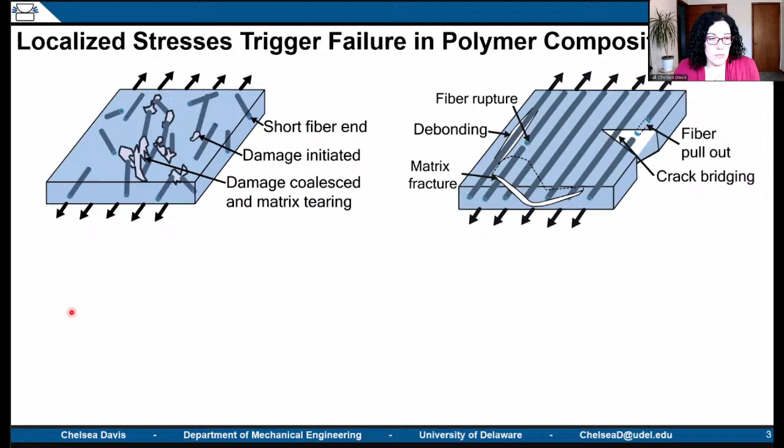events. So what we've been focusing on in my group is how can we use these mechano-responsive materials to highlight where stress is concentrating and then to observe how, if failure initiates, how does it propagate through the material? What is the chain of events of stresses that get distributed through the material as it fails?

So what we're going to be looking at today is how stresses accumulate and then lead to failure around round and, how should I say this, flat fiber end geometries. So we're going to be looking right at the fiber tip of this chopped fiberglass you would see in all sorts of moldable composite systems.

So as I said, we're going to have two main goals of this particular portion of our research. We're going to be trying to visualize these localized stresses and develop a quantitative strategy that allows us to take pictures of the mechanophore that's activating and interpret that as stress distributions within our material.

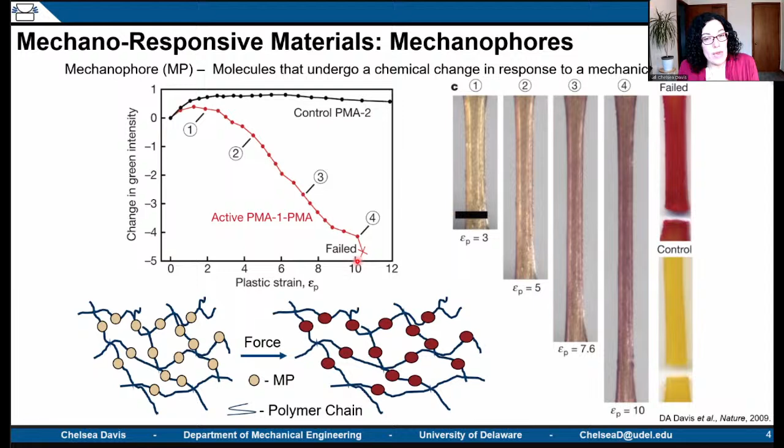So we did not invent mechanophores within my group. We are not chemists, and we are standing on the shoulders of giants in the sense of we are utilizing mechanophores that have already been developed in the labs of Jeff Moore and Nancy Sottos, as well as we're using the particular form of spiropyran that has come out of the lab of Professor Steve Craig at Duke. And these mechanophores have been shown over the past couple of decades to have this really, really specific change in their color or change in their intensity as a function of how much mechanical deformation you apply to the system.

So when we first started working on mechanophores in my lab, I kept getting the question of if you pull on it, does it get brighter? And in that, you have to be really specific about what it is. If you're talking about the continuum system that you're pulling on, yeah, the more you pull on this object, the more color saturation you'll observe, or the brighter, the higher the fluorescence intensity you'll observe.

But if you're talking about an individual molecule, these are fluorescent molecules that have a very specific quantum efficiency or a very specific brightness. You can think of them as a binary reporter, right? They are on or they are off, and that's it. So what's really happening when we pull on one of these highly deformable elastomeric polymer networks is we're activating new populations of mechanophores with every subsequent strain step that we're taking. We're turning on different populations of mechanophores as we elongate and stretch the longer chains in our network.

So if we think about how the number of mechanophores activated correlates to the amount of deformation in our material, we can then see that we can start to develop some fairly straightforward relationship between how bright our sample looks to how much deformation is in the material. And we wrote a review article a couple of years back trying to summarize some of this work in an engineer's introduction to mechanophores.

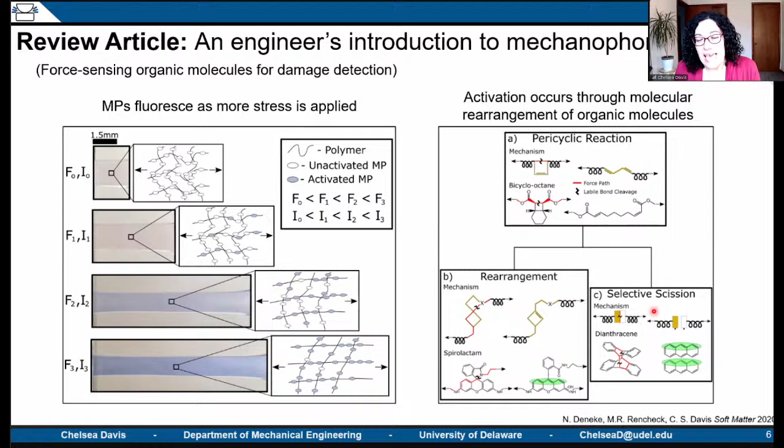And in that review article, we talked about the two classes of mechanophores that are most popular in the literature right now. And these all stem from some sort of bond scission event that occurs when you apply a force across a labile bond. And by biasing the activation energy, or the energy required to pop that bond, you can induce an isomerization in the case of some of these reversible mechanophores, like the spirolactam I'm showing here, or you can induce a selective scission event where the molecule becomes two molecules that will either both fluoresce or one half of the molecule will fluoresce after the scission event. And these tend to be irreversible mechanophores.

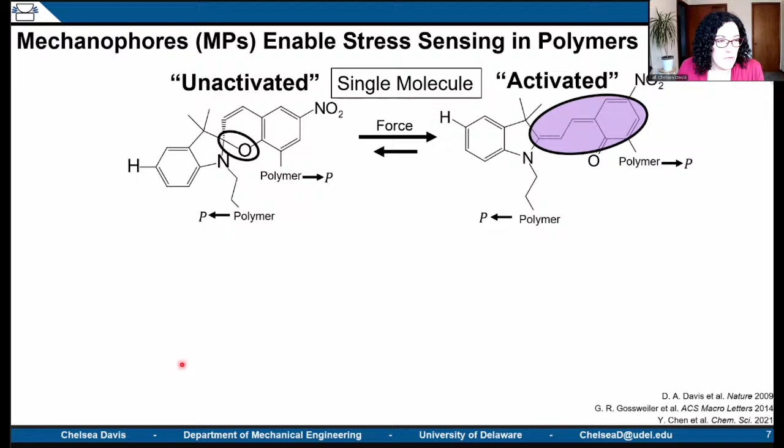So the particular molecule that we're using in my group right now, our workhorse, is spiropyran, particularly the nitro form of spiropyran. And when we have this molecule in the unactivated state, you can see this carbon-oxygen bond is going to be the bond that we're targeting. So we're applying a load at these two polymer handles, and if we apply sufficient force, you'll observe that the molecule opens up, goes to an isomerated state, or an isomer of itself, and you can see the conjugated state that it adopts, and this is where the fluorescent center of this molecule is going to be found. So this particular molecule is really fun because if we put it into a transparent silicone, which is most of what I'll be showing you today, we can write the Davis Research Group's initials and see them under a fluorescence microscope.

And we also get this visual color change that requires just our eyeballs to be able to identify. So with all of this, this is really nice, but so far everything I've shown you is on or off, more or less. It's really, really qualitative and sort of wishy-washy. And what we wanted to be able to do was to put numbers. Can we say it is this bright, therefore the stress is X at this location within our material?

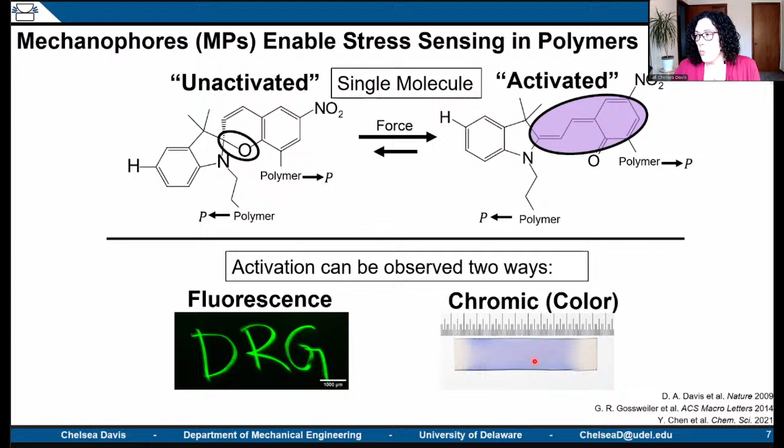And we weren't the first people to think about this. So several groups have used either digital image correlation. This is where you put a bunch of speckles onto your system and then track how those speckles move relative to each other in order to map a strain field onto your material. Or several other groups have utilized finite element modeling to calculate what the stresses should be within their material. And two of the first works that came out trying to correlate this stress response to the fluorescence intensity of mechanophores were looking at the stress concentration ahead of a propagating crack.

So if you take something like a multiple network gel and you put a notch in it and then deform the material, as you deform the material further and further, you get a larger stress field arising around the tip of that crack. And they correlated this to the activation or the intensity of their mechanophore. And this has happened in rubbery and glassy systems. But for us, we're working with polydimethylsiloxane. We're working with Dow Sylgard 184, sort of the classical perfect elastomer, which is a terrible way to describe it, but it has become a material that a lot of people in the soft matter mechanics of materials community use as sort of the test subject of choice.

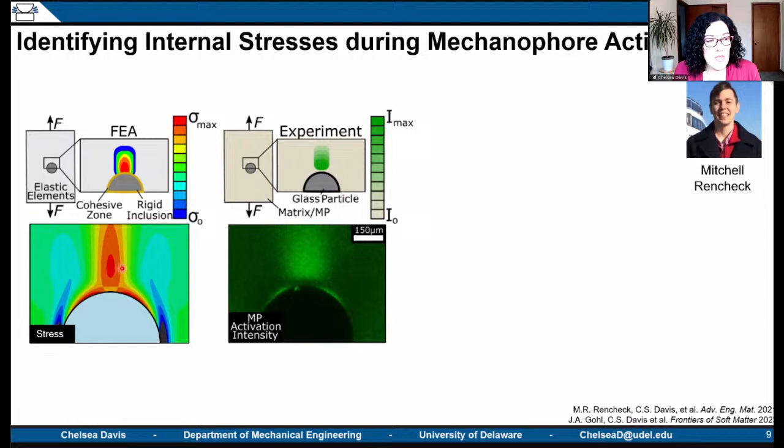So this is a little glass bead that we've put inside of a big chunk of this transparent mechanophore functionalized silicone. And if we deform this single particle composite, we can observe at the poles a really significant stress concentration and stress distribution occurring near the surface of our sphere. If we then take this, which is maybe one of the easiest geometries possible to simulate with finite element analysis, we can calculate what the stress field should look like in one of these loaded samples. And then by simply applying a spatial correlation between what we've calculated the stress should be and what the fluorescence intensity is that we observe in our microscope, we're able to get some sort of quasi-linear relationship between the mechanophore activation and the deformation of our material.

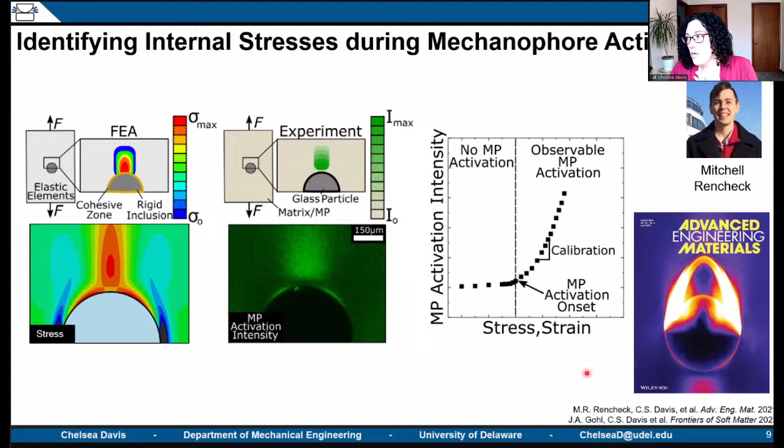And this was the first mechanophore paper that came out of my lab several years ago, showing how we had performed this analysis. So in order to do this, I do want to tell you a little bit more about the system we're using, the mechanics of the experiment. So all that we're doing is we're combining a micromechanical load frame that is going to deform the sample laterally over the objective of a laser scanning confocal microscope.

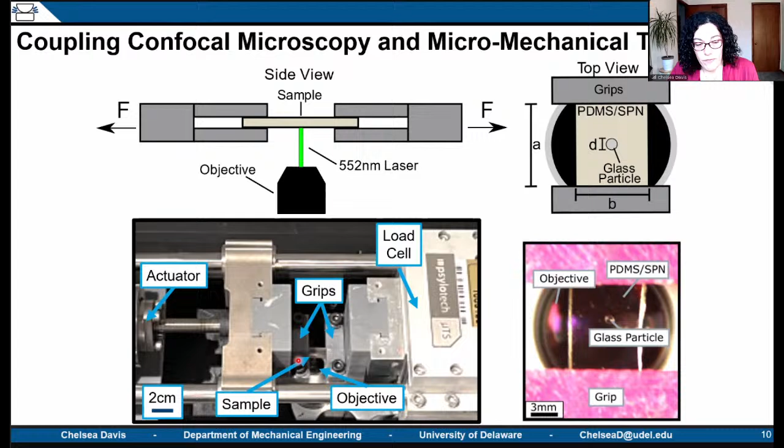So this is what it looks like as a straightforward cartoon, where we have the bead centered over this big circle here as our objective. This is what it looks like when you look down at the microscope, where the particle is about 1 millimeter across, and we can see the objective underneath it. And then here is just an image of the Psylotech Mu-TS that we utilize in order to perform these experiments. So there was quite a bit of materials characterization and sort of process refinement leading up to being able to do this.

And after Mitch graduated, another graduate student in my lab, Jared Gohl, came in and really helped us with the chemistry to refine and control the interface between our particle and matrix. So as I said at the beginning, what we care about is composite interfaces. So what Jared did with his undergrad research assistant, Tristan Wiley, is they functionalized the glass particle before embedding it into our mechanophore functionalized silicone with either a long perfluorinated silane, a short perfluorinated silane, or a vinyl termination.

And this was our attempt to get low, medium, and high adhesion, because in the case of the vinyl terminated silane, we could induce covalent attachment as we cured our PDMS matrix around the particle. And this was really successful. This was a fairly straightforward strategy that allowed us, if we look as a function of strain, I'm pulling up and down on this object.

And here in the low adhesion case, the sphere acts as sort of a void in our sample because there's no real crosstalk or interaction across the interface. And you can see the mechanophore starts to light up at the poles where the particle is preventing the hole from adopting the full ellipsoidal grain of rice void structure that it wants. But what's more interesting for us was we observed really interesting Gent-Park debonding or Gent-Park cavitation that occurs when you have a weak-ish interface that holds for a while, stores a lot of mechanical energy, and then leads to a large-scale cavitation event. So this you can think of as like a hollow Easter egg that has opened up at the top and bottom of our particle.

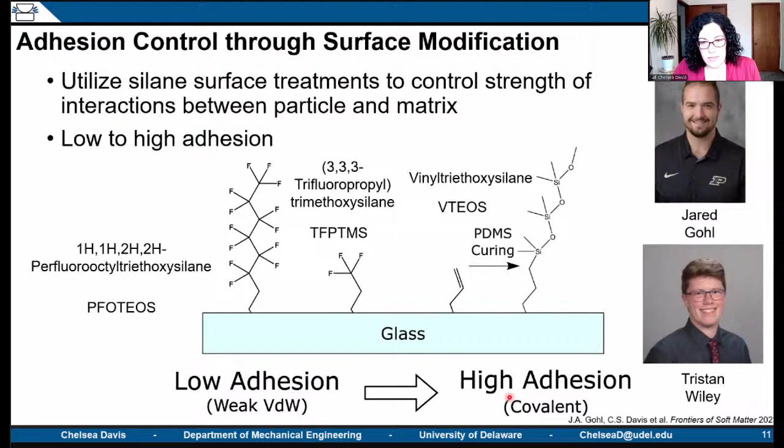And I don't know if I can play these again. Let me try. For the high adhesion case, what we were really going for, this was not the highest adhesion case. We improved our method a little bit beyond that. But if we keep going, we're already at 40, 45, 50% strain. And you can see the interface is starting to fail in the two lower cases. But here, what isn't it going? There we go. You can start to see stress happening around 90, 100% strain. And we're going to get a Gent-Park debonding on one side, but we really care about this right here. This is going to allow us to perform the calibration that I showed you on the previous slide.

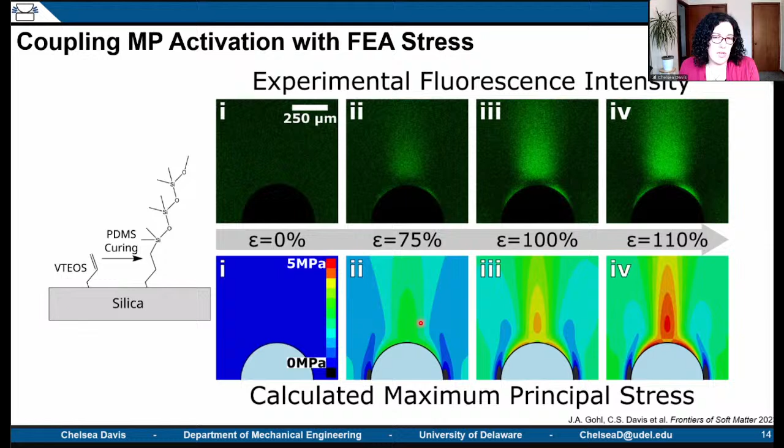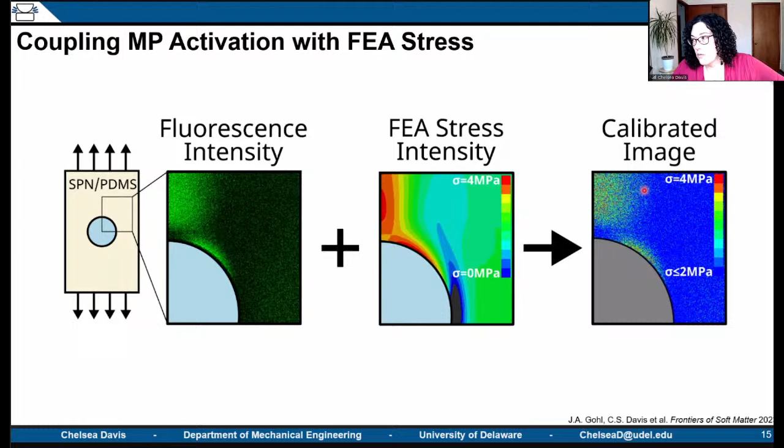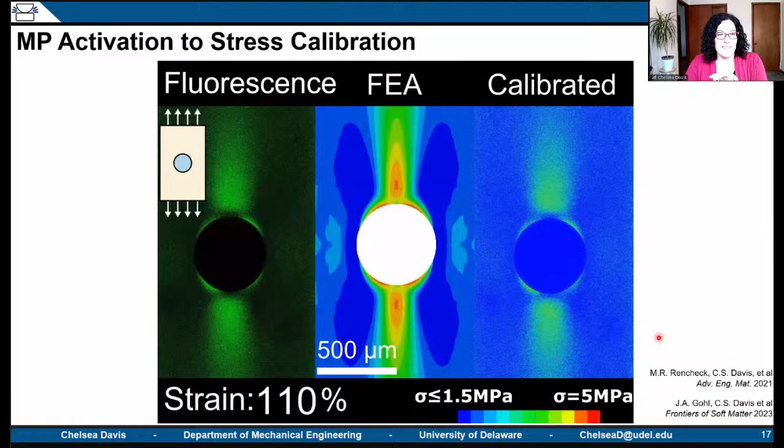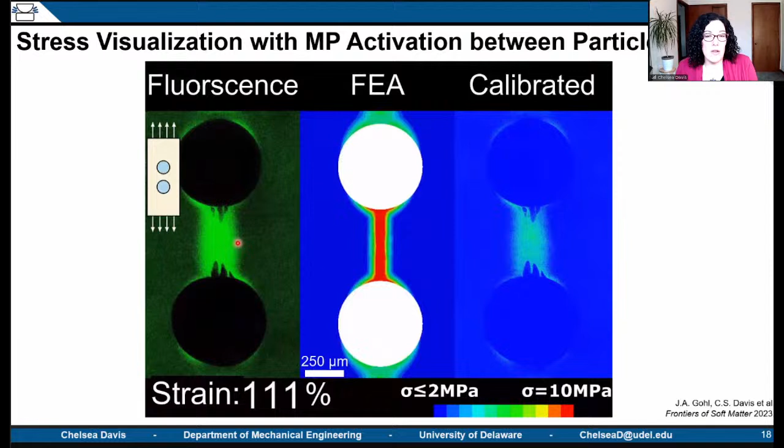So what I'm showing you is just what I showed on the previous slide now in video format during one of these experiments where we have the fluorescence intensity, we have the FEA doing absolutely nothing until about 70% strain, and then we have our calibrated image where we have mapped these two and you can see the stress. Okay, I am underwhelmed that this works because this is the experiment we calibrated to. But now we can take that same calibration, and if we take two particles that start at one radius of separation and start pulling them apart, what you'll observe is we get this really exciting crosstalk or concentrated stress event where you have these two particles really close to each other. And this starts to become important in particle reinforced elastomers, like the tires that you drove to work on.

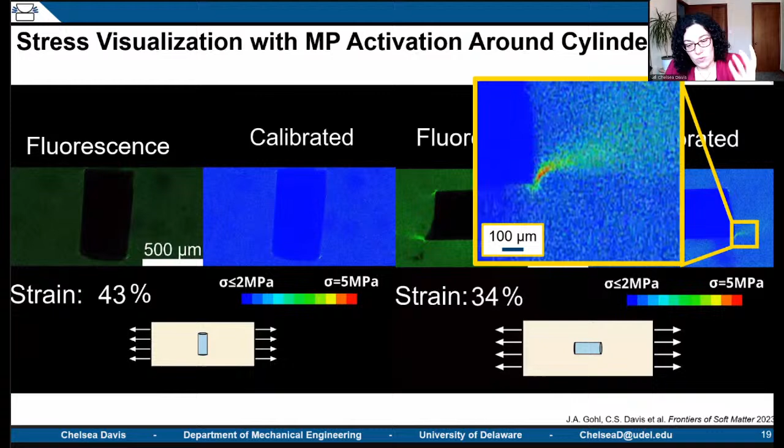And I particularly love this image or this video because it really highlights why we're doing this. Why are we trying to use mechanophores in order to visualize stresses? And it's because it allows us to see features or stress concentrations on the order of tens of microns, which we haven't necessarily been able to do before. So now that we have this hammer, we kept looking for other nails. And the next student to join my group came back to this question and was like, well, we've seen what happens around a single spherical particle, but what happens at the end of a fiber if you start messing with the shape of that geometry?

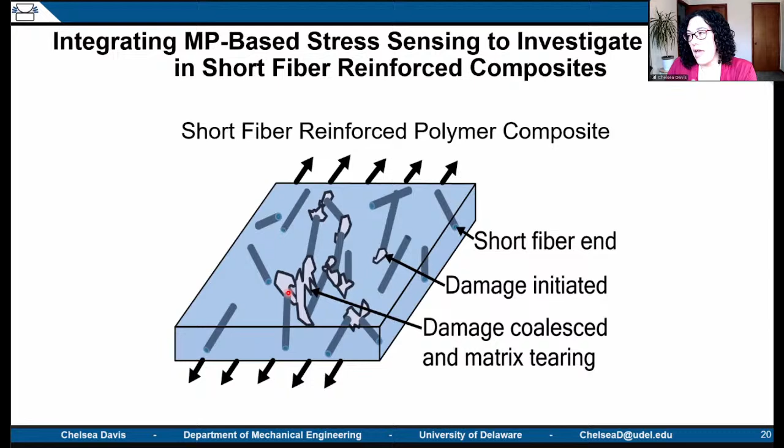So in short fiber reinforced composites, some people are starting to propose modifications to the geometry of these fibers in order to toughen the whole system and prevent fracture events, or at least enhance their fracture toughness. So my current senior student in my lab, Nazmul Haque, has been working on just that.

We recently published an article where he took really big glass fibers and performed single fiber pullout experiments where he was still using his mechanophore functionalized matrix. And now he's going to pull one giant fiber out of the matrix, and he's messed around with the shape of these different fibers, going from round all the way to flat.

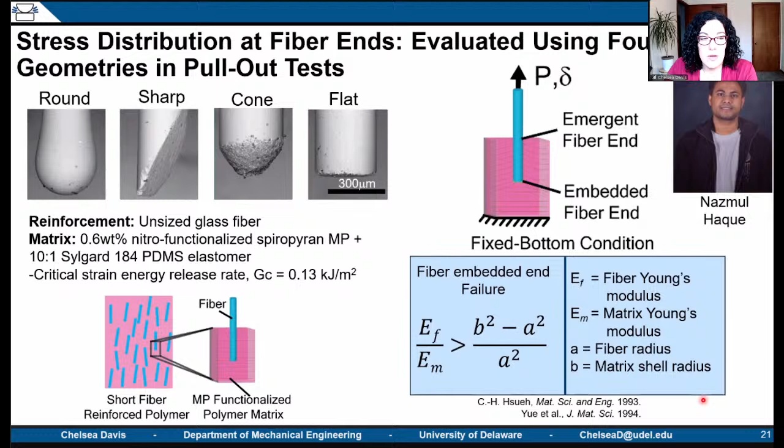And he was really careful to follow some of the analysis that already exists in literature from the 90s in order to ensure that in all of his experiments, the failure event occurred at the bottom of the fiber, or the embedded end, rather than at the emergent end and then having the matrix just unzip from the top down. And he's performed all of this analysis to ensure that his geometry and modulus mismatch between fiber and matrix was such that we always get embedded fiber end separation.

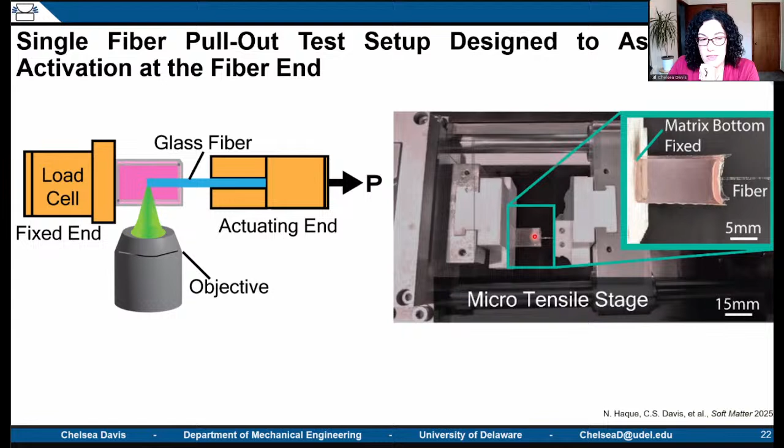So his setup looks very similar to the setup I showed you before, only now instead of holding the whole sample, we're going to use one grip to hold the matrix and the other grip to clamp the fiber. And we're still going to look right here at the fiber end. But for all of the experiments that I show you, in my head, it's just easier to think of the system as upside down. In reality, we look down at it, so it doesn't matter how you turn your head. But these are how we're going to be looking at these experiments.

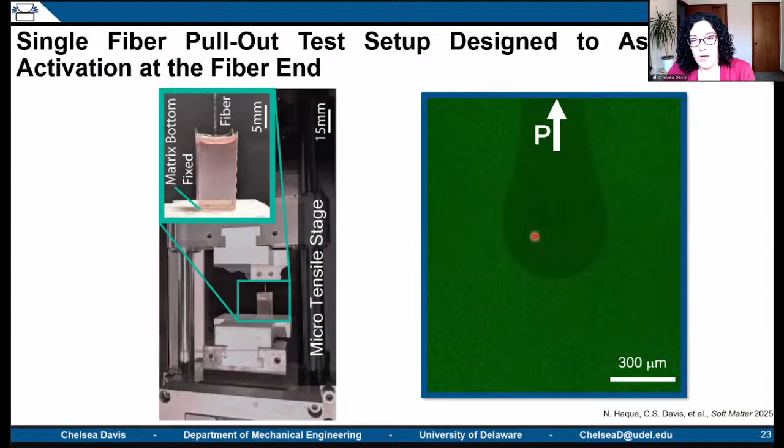So this is the flat geometry, where you can see that we have very intense activation, but in a very specific way, where we are only observing mechanophore activation due to sliding or the very high forces that are occurring right at the edge. And we only saw a tiny bit of activation right at the edge. Whereas if I play the round fiber geometry again for comparison, you can see that we get this very large region of activation before we actually get failure in the bulk that I cut out. I cut out that frame.

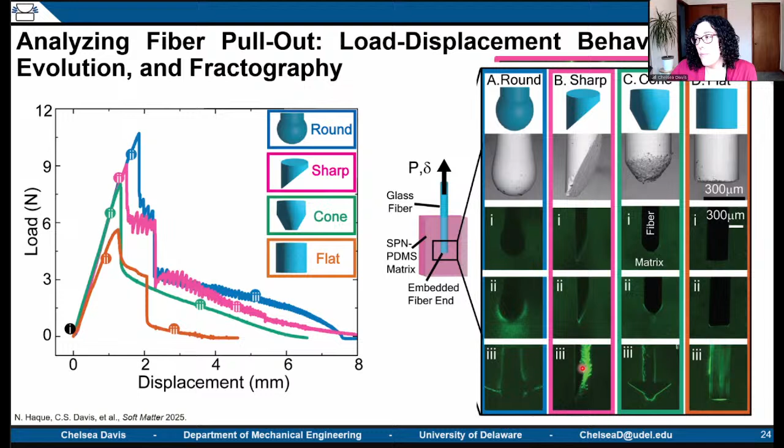So we can utilize mechanophores in order to see stress concentrations around all of these different fibers as they're being pulled out and then pulled through the matrix. And because we have the ability to see small features, we can start to do a little bit more thorough analysis in order to understand how good of a job our calibration is doing at describing what we expect to see based on what the finite element calculations of the stresses in our matrix are.

And we believe that this is due to the fact that we're using a perfectly elastic mesh for our FEA, and we're not incorporating any damage or allowing any damage or chain scission events, which are almost certainly happening at these high loadings within our polymer network. So we're working to see if we can incorporate the idea of damage and stress redistribution as a function of damage within our network.

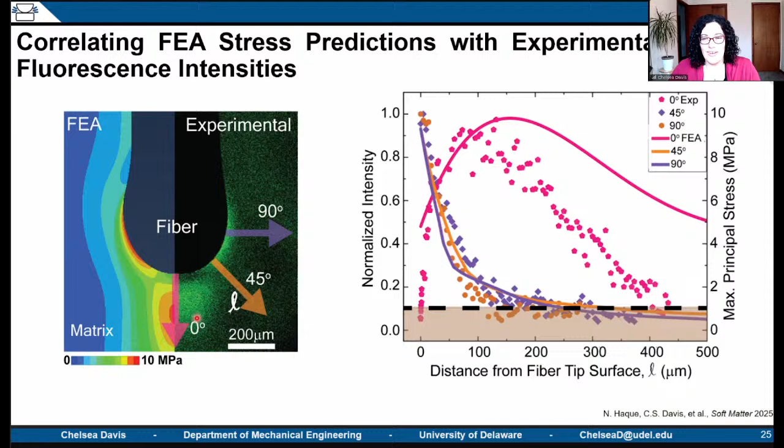So we were able to show a matrix. This is just a figure out of that article from Soft Matter earlier this year, where we observed the different fracture events that occur around these different fiber geometries. So this is all work so far that has been done in the bulk. But my background has always been caring more about interfaces than bulk deformation.

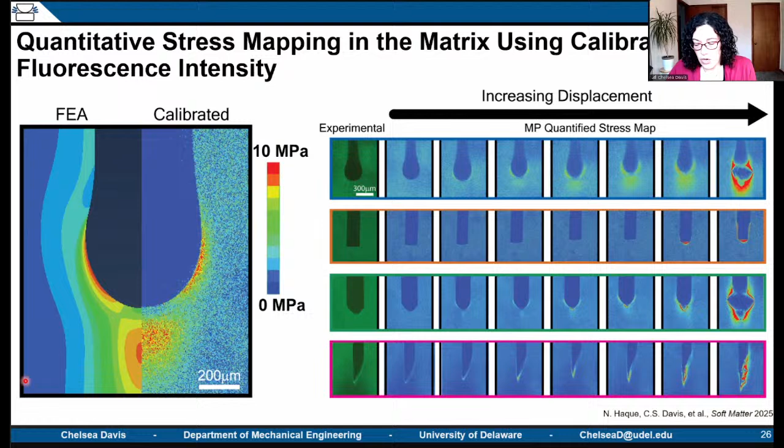So I was always curious and have been wanting for a very long time to install mechanophores at the interface between a reinforcing particle and the polymer matrix, rather than putting the mechanophore in the bulk itself. And I had this opportunity when my group was awarded a small contract from the Semiconductor Research Corporation, where in microelectronic chips, there's a concern when you have microelectronics that are sensitive to humidity and oxidation and all sorts of environmental degradation modes that are always encapsulated in some form of polymer matrix.

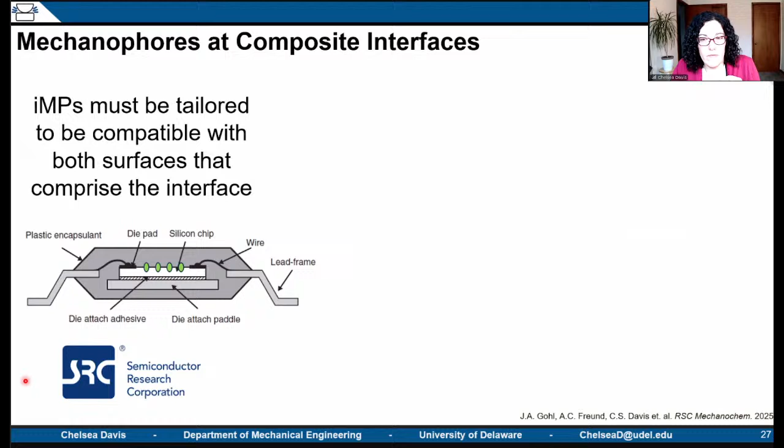And if the interface fails, you have to be able to detect that delamination or debonding event before it's big enough that you can see. And we thought mechanophores might be a really exciting way to interrogate molecular scale or even sub-nanometer separations in the interface. So in order to do this, you have to think about designing a mechanophore, and this is the challenge for the chemists on the call.

You have to think about designing a mechanophore that has what my group calls an asymmetric functionality. You can't have the same handle on both sides of your mechanophore. You have to have some sort of different chemical reactive group or reactive species on the two sides of your mechanophore. If you don't, then whichever surface you functionalize first is going to end up with the mechanophore just attached in a loop across the surface.

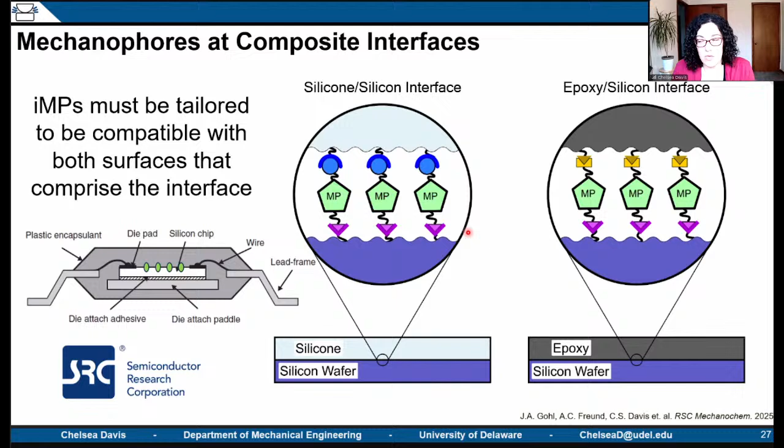So if you're going to have a silicone-silicon interface, that's going to require a different functionality, or a mechanophore with very different functionality than one that you're going to attach between an epoxy-silicon interface. And these are both encapsulating materials that are used in the semiconductor industry. So this is very much ongoing work. All that we've done so far is publish a proof of concept.

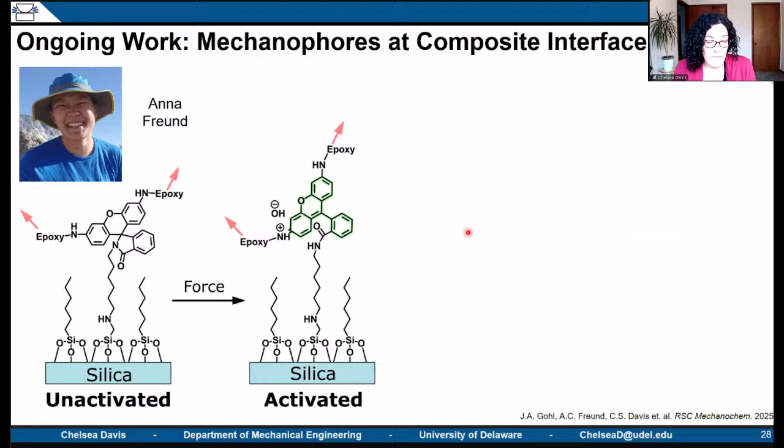Others have published several explorations of these, mostly looking at particles that are functionalized with a mechanophore that have some sort of polymer tether that entangles into the polymer network or into the solution or a suspension of these nanoparticles. And those have already been demonstrated. Others have figured out how to do this chemistry. What we were excited about was this initial proof of concept that we can get interfacial activation at the interface in a thermoset matrix cured around a rigid inclusion.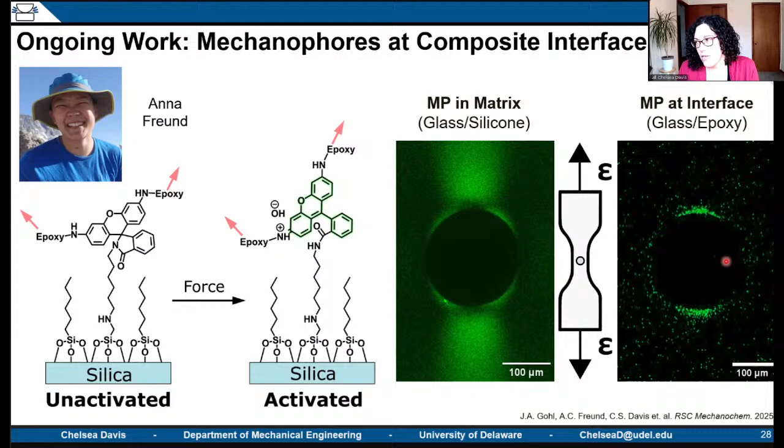All right, so with that, I do want to take a couple minutes and tell you about the cutting tools that we've been developing in my lab that allow us to observe mechanophore activation ahead of a propagating crack tip. So if you'll remember, at the very beginning of this talk, I motivated with this idea that calibration has been performed at the stress concentration that occurs ahead of a propagating crack tip. In our materials, our silicone specifically, that are too brittle to allow for spontaneous crack propagation, we haven't been able to observe this stress concentration because the crack propagates too quickly through our material.

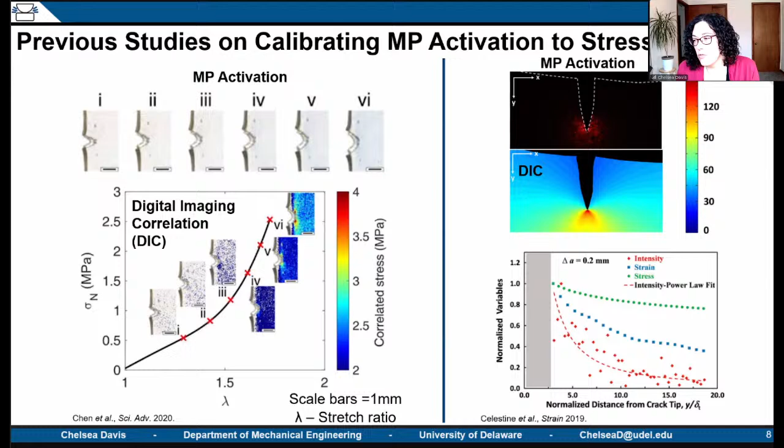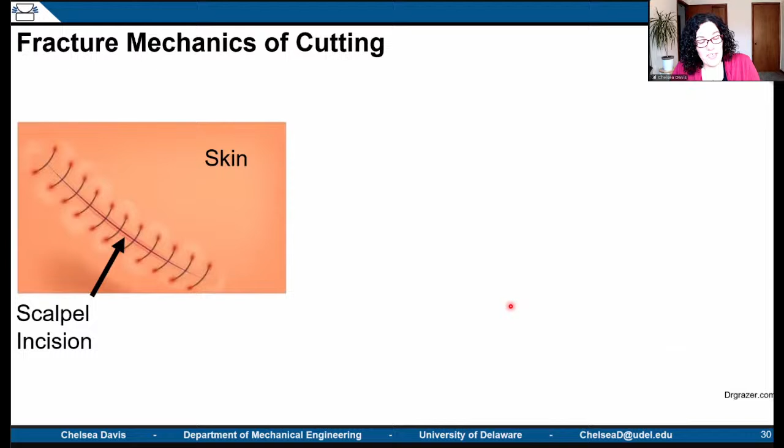So the solution to this is to start thinking about cutting mechanics. In cutting, you control where the fracture is and where it goes by controlling the force that you're applying with your blade. So this should surprise no one: a sharp blade is better for cutting than a dull blade. You all know this from cutting a tomato or by seeing that surgeons' scalpels are very, very sharp. And all of this relates to the force required to propagate a cut. So what we're interested in is the fracture toughness, or the energy required to create new surface.

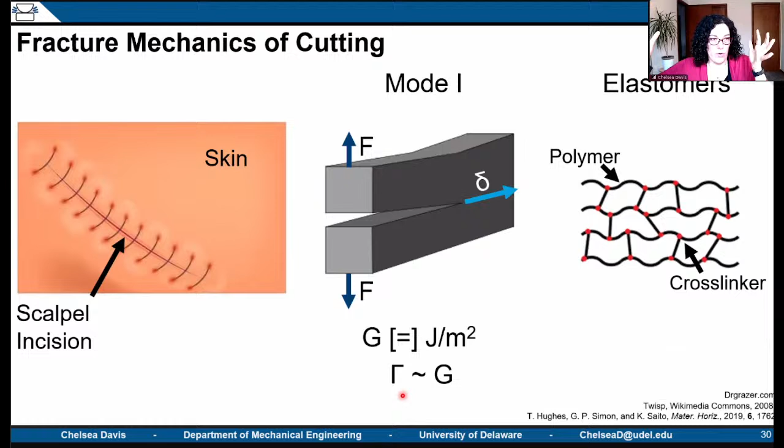And for elastomers, what we're focusing on cutting is a polymer network that is cross-linked or reacted at different sites and tied together into effectively one single macromolecule, right? So the Lake Thomas theory is a theory that was developed many years ago that effectively said the energy required for cutting is the energy required to break a plane of molecules that your crack has to propagate through in these systems.

However, in an elastomer, you have to think about not just the molecules right at the plane, or that dotted line where the crack is going to propagate, but there are also a lot of other polymer chains in that network that have to be moved out of the way and stretched and significantly deformed in order for that crack to be able to move forward. So you end up finding a much larger fracture toughness, or a much larger amount of material participating in the fracture event than was originally proposed.

So we're going to be utilizing a modified Lake Thomas theory that predicts a small damage volume. We can't see that, that's little. And then a large deformation zone that I think we can see with our mechanophores. So this green region is what we want to see if we can observe with our cutting experiments.

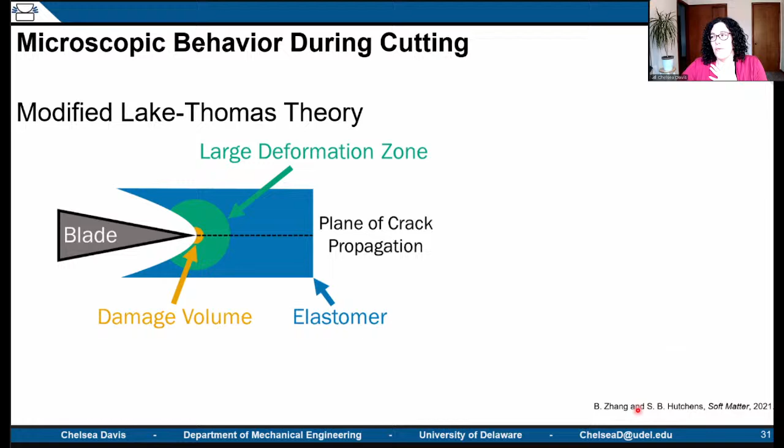And much of this is going to be drawing on the work out of Shelby Hutchens's group at the University of Illinois Urbana-Champaign, who brought to us the Y-shaped cutting geometry, which is going to allow us to isolate the cut directly over our microscope. So there are a couple of features I want to point out of Y-shaped cutting. Most obviously, you can tell the crack where to go and control how the material fractures. And also, we understand all the mechanics of this. We can measure all of the variables that I'm showing here.

So in Y-shaped cutting, we take a sample, we form it into a Y geometry, and then we apply a small preload to the two legs of the cut. And then we're going to shove a razor blade or a blade of some sort into the material. We're going to measure the displacement of our material and the force required to displace the blade into the material. And that's the experiment. From that, we should be able to get a cutting energy, which is going to allow us to then deconvolute the tearing energy, or tearing component, if we can get this half angle small enough, from the cutting component.

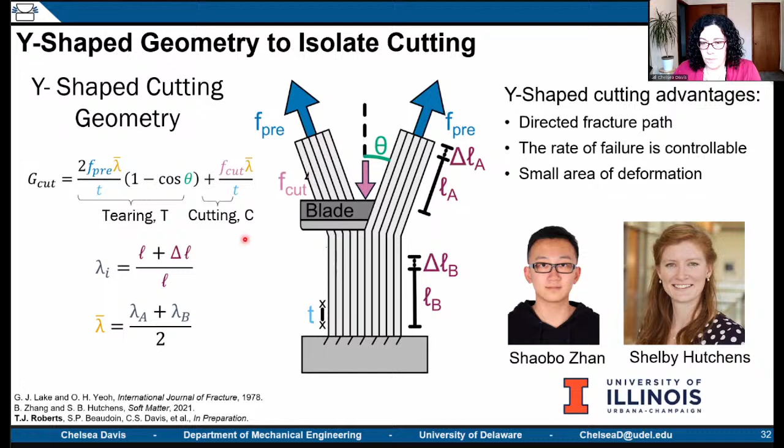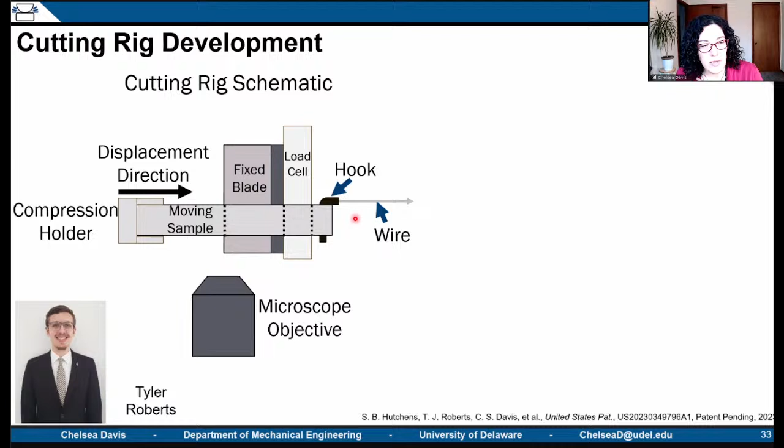So because Shelby's rig was a little too big to put on a microscope, my graduate student, Tyler Roberts, who's in chemical engineering at Purdue University, developed a new rig. So this was what we drew on the whiteboard, this idea of, instead of displacing the blade into the sample, we could mount the blade on a fixed load cell, fixed in space over a microscope objective, and then move the sample across the blade so that we could watch the cut continuously. So this is what he ended up designing. This is what he built.

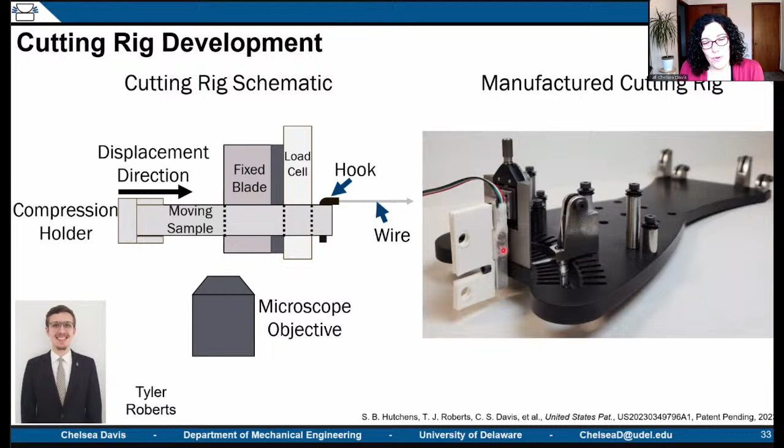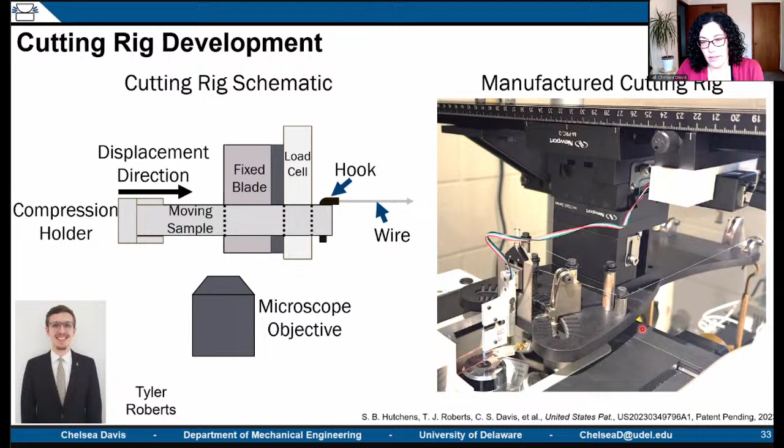And you can see here that we have a system of pulleys that are going to allow us to mount the sample. And then this is a $9 load cell and a 3D printed blade holder. And this is what it looks like installed over a microscope. So this is Tyler's cutting rig. He would be angry if I didn't tell you that this is the soft matter, low friction, Y-shaped cutting experimental rig, or the SLICER. I'm sorry, I don't have that on here, Tyler. So this is what this looks like in space.

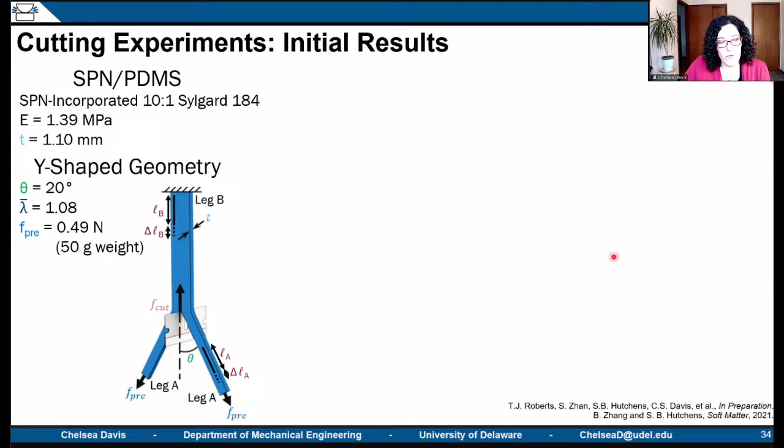And these are the parameters that we used for some of these experiments. So we're using the same exact mechanophore functionalized silicone, still using a 0.6 weight percent loading of the mechanophore in our system. We get a modulus of roughly 1.4 megapascals for the Young's modulus. We're going to measure millimeter thick samples with a half angle of 20 degrees, and you can see the other properties there. This is what one of these typical cutting curves looks like, where we can pull the F cut directly out of this. We know all our other parameters, so we get a cutting energy of approximately 107 joules per meter squared.

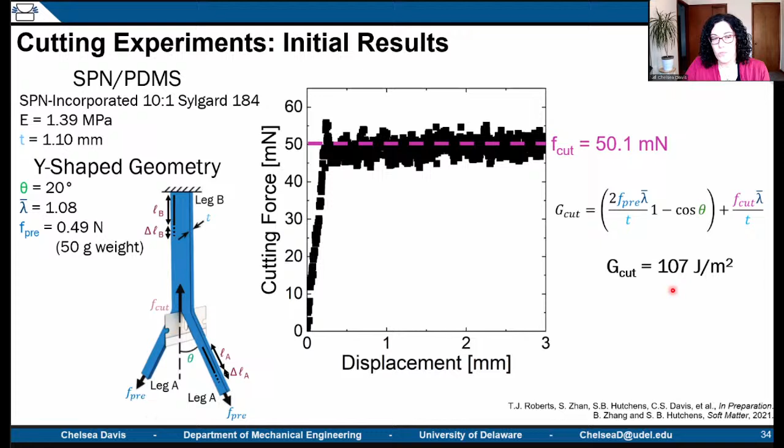Others have already reported the relationship of how sharp a blade is to the energy required to cut, but we did want to make sure that we were reproducing those experiments. So if you plot as a function of blade radius, or how sharp the blade is, there does seem to be a threshold below which there is no relationship between the sharpness of your razor blade and the cutting energy.

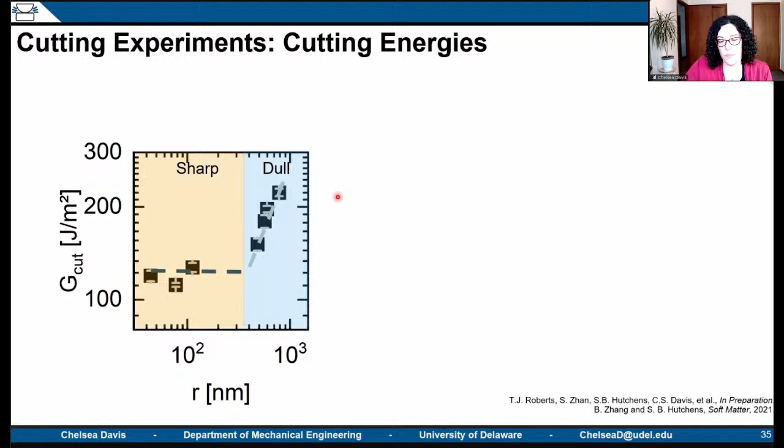But as you go to duller and duller blades, there does seem to be some sort of monotonic relationship where the duller the blade, the more energy required to cut. So this is the distinction we're going to make for the rest of this talk, where we're talking about sharp and dull blades. And this is what some of these blades look like.

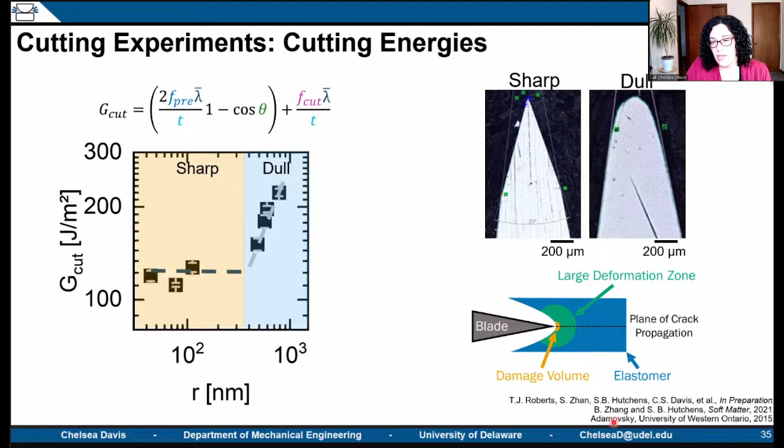There's a whole science of sharp that you can look at that speaks much, much more explicitly about what is sharp, what is dull, and how to achieve both. But let's get back to mechanophores.

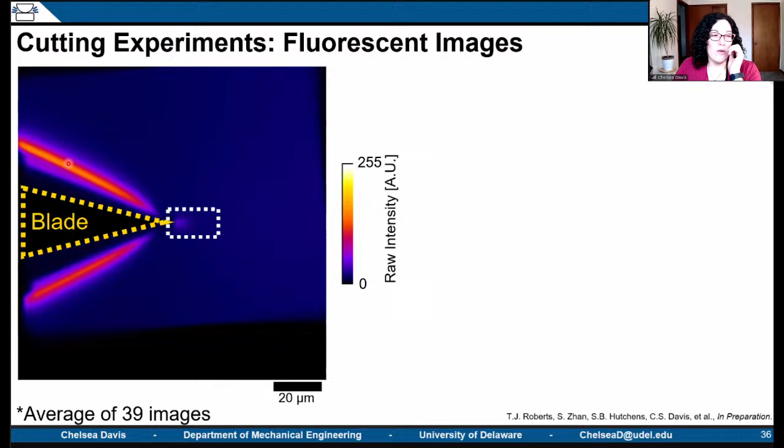So if we look at one of these experiments under our microscope, and now I'm using a different false color image, a different heat map or scale, to allow you to really see the concentrations. And you see for this cut material back here, you have this really bright fluorescence response, which is nice, but we only care about the highlighted region. So now we're just going to zoom in to the highlighted region.

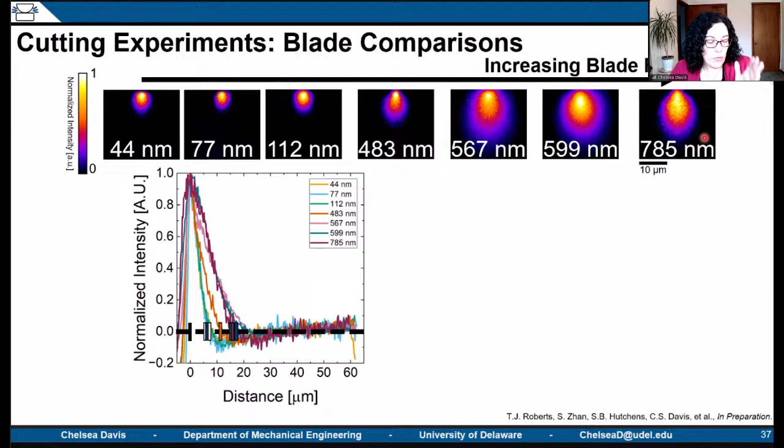And we can quantify this using the normalized intensity mapping. We can go through and say, okay, this is how large of a deformation zone we have as a function of blade radius, and get what we're calling the decay distance. And from here you can see a fairly similar relationship. I recognize these are 7 points, but you can see a fairly similar relationship between the sharp and dull blades: having no effect, and then a monotonic effect on this decay distance as a function of sharp and dull blades.

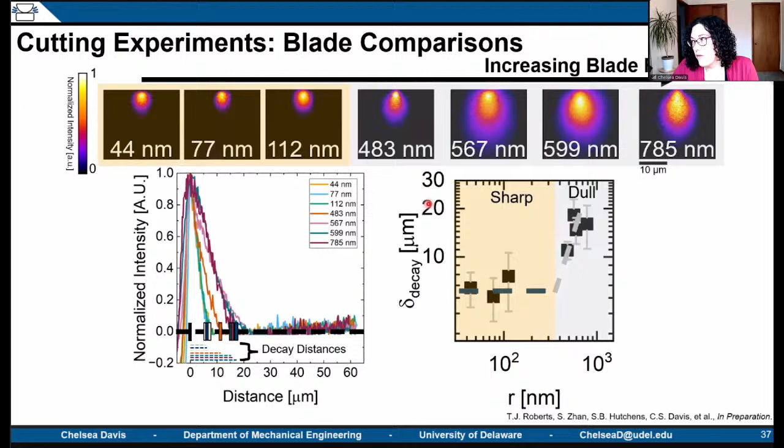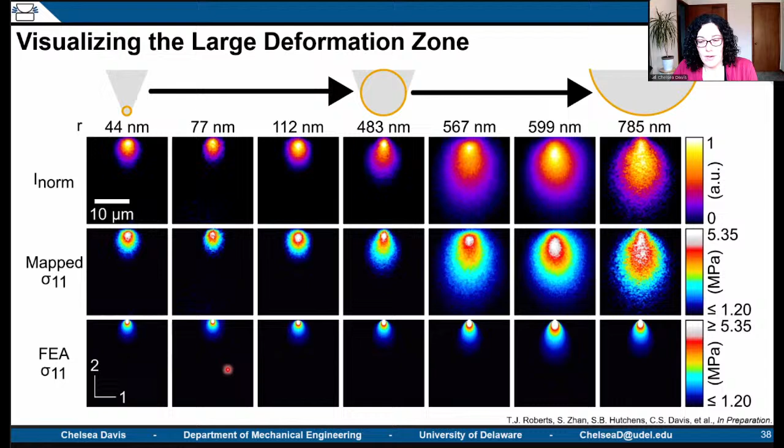So with that, I'm going to wrap up and just say that I hope I've shown you today some of the exciting ways that we can use these mechanophores that have been developed and are actively being developed in engineering modes that allow us to understand more about the deformation behavior of polymer composites, polymer matrices, polymer fracture. And mechanophores have really been a boon to the mechanics of materials, specifically the soft matter materials community. And I'm just very honored to have had the opportunity to share how we have utilized them.

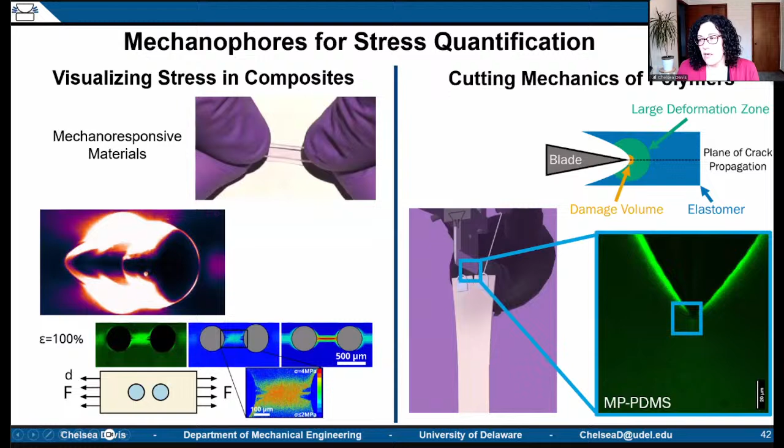Yeah, that's a completely fair question, and I was vague on purpose for those measurements. We have since gone back and performed JKR experiments, which is a Johnson, Kendall, and Roberts contact adhesion test. But for us here, this was simply a proof of concept. So low adhesion, if I'm going to quantify it, occurs where failure between the matrix and the particle is going to occur at single percent strains.

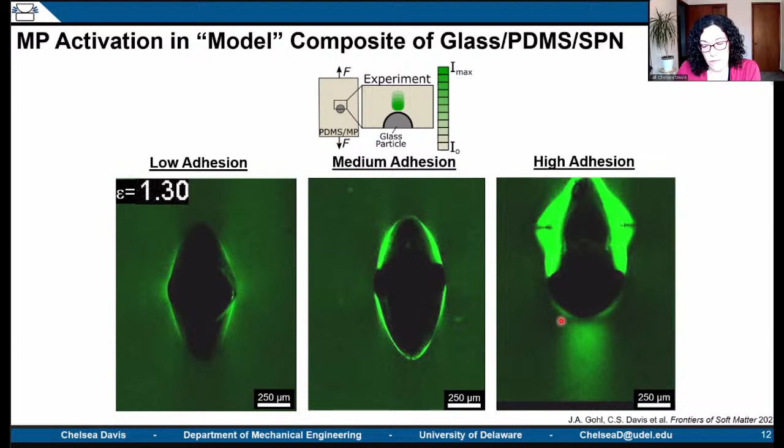And here I kind of glossed through it, but we got even higher adhesion to the point where we started observing the formation of cavities in the material, which is very different from this large scale interfacial separation. So for now, we haven't published our quantification of adhesion, and we're just using these as qualitative descriptors. All right, thank you.

All right, next question. Can you back out specific stress tensor components from the mechanophore illumination? Does the bond scission respond differently to shear versus tension, or is it some global average? Oh, I love this question. In order to perform our calibration, we needed a scalar quantity, right? We needed a value that we could plot or compare. The intensity is a scalar quantity, right? Stress is a tensor, totally fair.

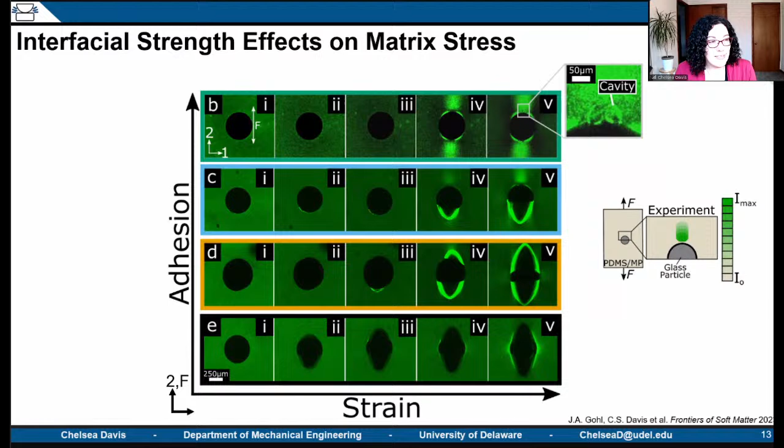So we went through a whole series of trying to understand which is the appropriate stress descriptor to utilize in this case. On a single molecule scale, mechanophores, to my understanding, only activate in tension. You have to have a fully extended polymer chain plus a little to pop the mechanophore that we're looking at. So on a molecular scale, the answer is tension and only tension. We are working with nearly incompressible materials. I think the Poisson's ratio is 0.49-ish.

So even though we're applying a global uniaxial tensile deformation, we're going to have a huge amount of activation arising from shear that is coming from Poisson effects. And in fact, that's why we see such a bright response right here at the interface of our material. We see this, which can only be a result of really high shear stresses. We have thought deeply about this. Others are thinking deeply about this.

We started out with hydrostatic stress. That was not great because we didn't allow any shear to be incorporated into our material. And you can see that it does not have the same shape as what we observe in our real experiments. So to end a really long answer, we settled on max principal stress as our stress scalar for our magnitudes because we allowed the stress tensor to rotate. And that was the best way we could think of to incorporate the shear stress effects and get something that semi-quantitatively matched really well with what we were observing in our experiments.

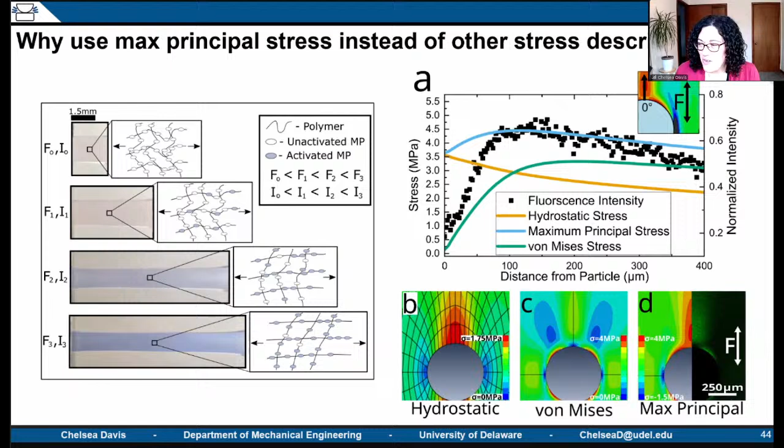I have two questions that are related to the implications of this work, and they were not asked by the same person, but I'm going to combine them into a single question and see how you do. Are there any implications of this for, first, a better understanding and prediction of fatigue failure, and secondly, of synthesis using ball mills? I realize those are two different things, but I've combined them.

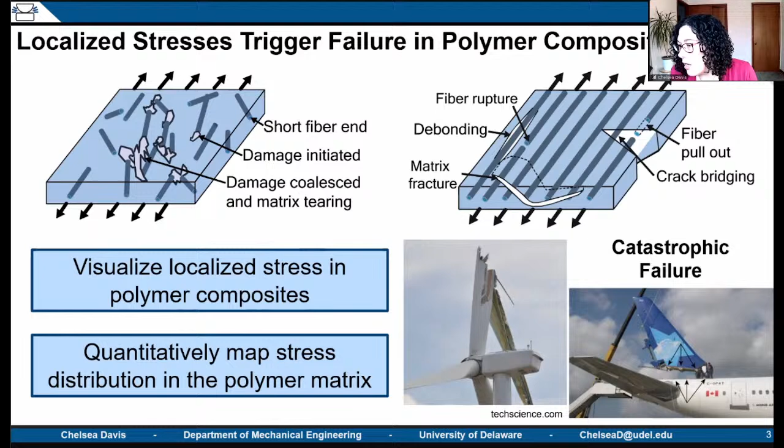Yes. I am very unfamiliar with synthesis using ball mills, but I'll give it a go. It depends on your mechanophore and the mechanochemistry that you select. I thought I was anticipating the question, and this was not the question. Well, the first one was fatigue failure, so maybe that one is easier.

Okay, so for fatigue failure, I was watching this video as I was setting up this presentation. Nasmol is stretching this three different times, and to me, it looks brighter the second time than the first time. It depends on your mechanophore. If you use the spiropyran nitro substituted form, those mechanophores tend to stay activated for a couple minutes. If you use something like spirolactam, one of my really early papers showed that it stayed activated in a glassy polymer network for months.

If you use spiropyran hydroform, or hydrogen form, that stays activated on the order of seconds before it reverts. So if you're looking at damage accumulation under fatigue or cyclic testing, you have to be really cognizant of the reversion rate of your mechanophore with time, and relate that to the strain rate or how quickly you are applying those cycles. I think there is potential there for using this to measure damage accumulation, which I recognize is not exactly fatigue. I think we could do it for fatigue.